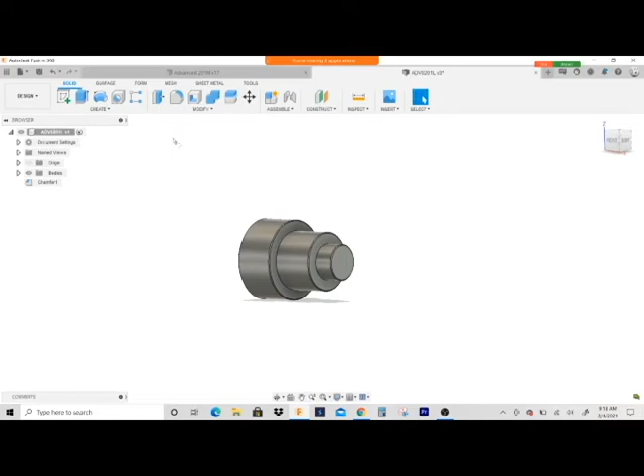So we're gonna go over the lathe section of this. Like I said earlier, if the part doesn't have chamfers on it, just put like a 10 thousandths chamfer on there, unless otherwise specified. And that just helps smooth the part, so you reduce any kind of burr that's on the corner.

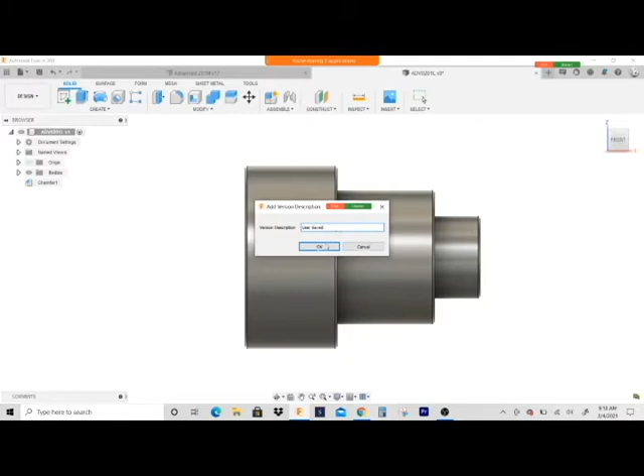Alright, so we got this part. It's going to be right on the lathe. So I'm going to go to manufacture. And once I'm in the manufacture mode, I'm going to go to setup. And I'm going to tell the software that I'm cutting it on a lathe. So it's going to be this turning.

So where it says turning or mill turn, what they're calling mill turn is basically a lathe with live tooling. Because just keep in mind, some lathes have mill functions. They have like a C or Y axis mill capabilities, similar to the video we watched last class. So I'm gonna put it on turning.

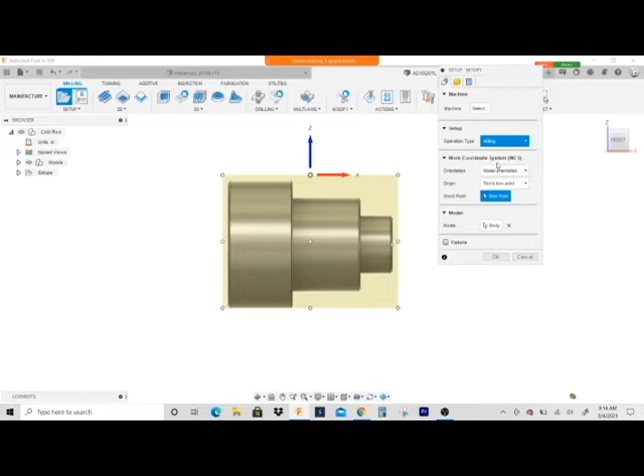And I would suggest, not everybody does it this way, but I think it's the easiest way to do it, to put your origin not on the stock front, because you look right now, the Z0 is on the tip of the stock. Put it on the model front, okay? If you have to do any kind of editing on the program, that makes things way easier.

Also, when you're setting the machine up and running your first initial part, it's really helpful to have your Z0 on the face of the part, because when you're watching your distance to go and watching the tool, make sure it looks like it's going that distance. It just makes things a lot simpler.

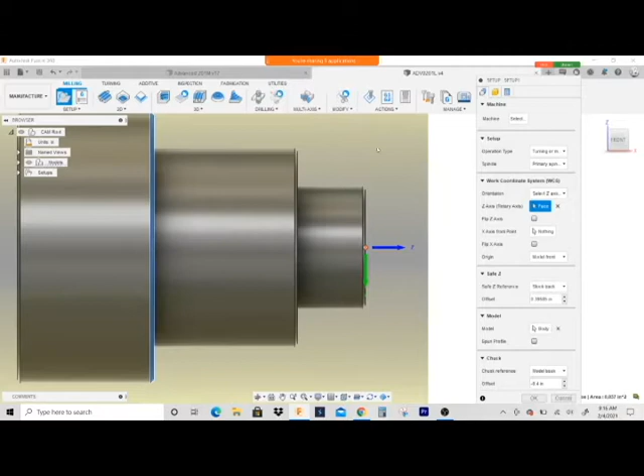Like say that you have to turn back a 1/4 inch, right? So if you look at the program, and it says that it's turning back Z minus 0.25, and you're watching your distance to go, and it's telling you that once you get to Z minus 0.25, you don't have to go any further. It's going to go up this shoulder and then down this nose. It's just a lot simpler.

I would think that Fusion would have that by default, but I guess not everybody uses their lathe like that. I don't know. It seems to make more sense to me to use a lathe where the Z0 is on the face of the part.

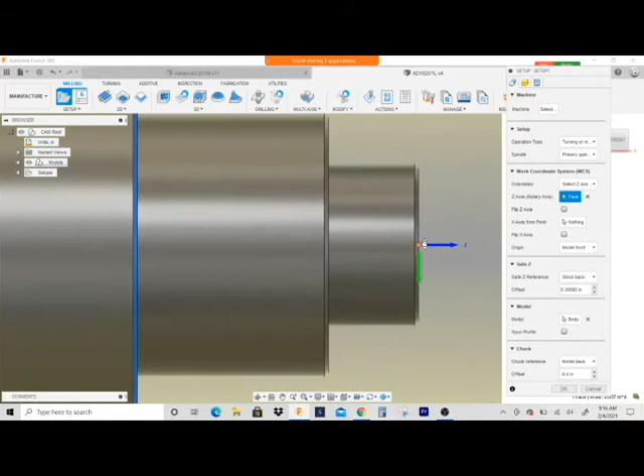Okay, so I'm going to go to my stock tab. I'm going to put it on fixed size cylinder. And the reason why I'm doing that is because if you use relative size cylinder, the first face pass and the OD pass, it may try to take too much material off. So you probably don't want to use a relative size. I would definitely put it on fixed size.

And the OD is going to be 1 inch, which I'm assuming you are using 1 inch material on that. Are y'all cutting this to length, or are y'all gonna part it off on the lathe? Yeah, parting it off is probably the best way to do it. Now, when you first start running the lathe, it may be more troublesome trying to get that part off tool set and working right, but it's relatively simple, really. It's actually easier to just part it off.

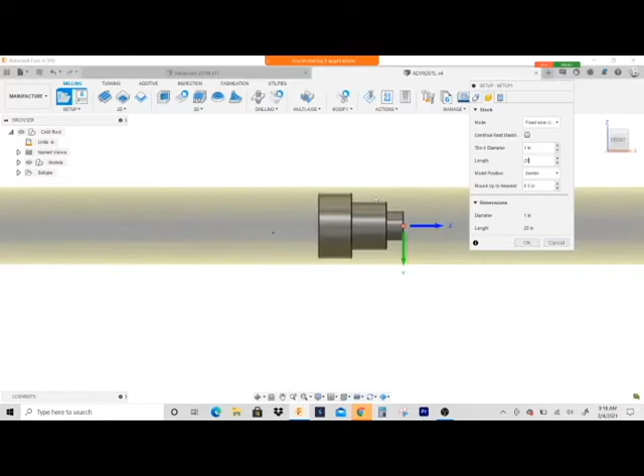But what I would do is, I'm not sure what the through spindle bore size is on the lathe, but let's say our stock's 20 inches long, so you have like a 20-inch piece of material. Now it looks funny on the setup preview. That's because I have to change this model position to be from the front.

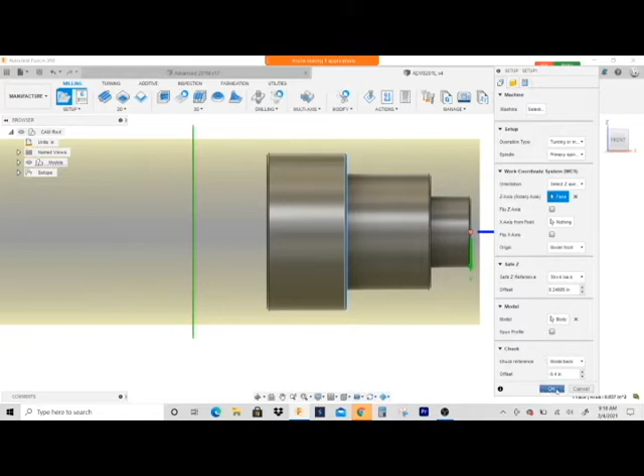But we want to give ourselves some material to face off. Because right now, there wouldn't really be anything to face off. So I would put like 50 or 100 thousandths. 50 thousandths is probably good. So it's gonna look something like this. Yes.

Well, the part off tool would cut it. Yeah, so what you would do is you would face it, turn OD, and the part off tool is gonna part it off to the right length. And I'll show you what I mean in just a minute.

Okay, so first thing I'm gonna do is I'm gonna go to face, and I don't know what y'all's maximum RPM is on that lathe, but yeah, you're cutting aluminum, so we'll go maximum 3,500. That might be a little fast. Yeah, we'll just put it at 3,000.

And I would always use feed per revolution. By default, that should be checked, but it's not. But you're pretty much always going to have your feed rate per revolution on a lathe, unless you're like cutting plastic. If you can, just go maximum RPM at all times. And because of our feed per revolution, I guess it would help to select the tool first.

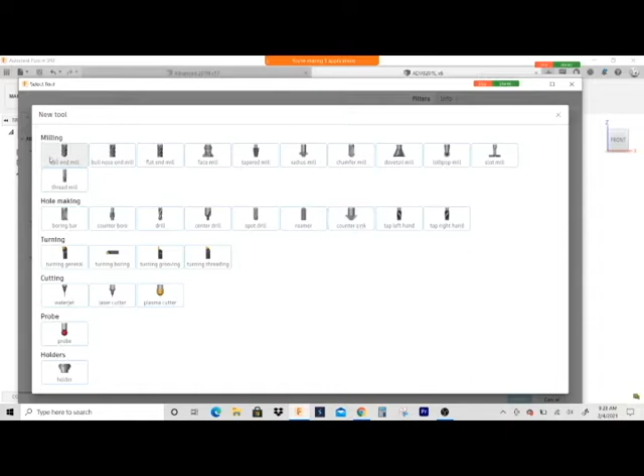Okay, so to create the tool, I'm gonna go to this plus sign, and remember that plus sign is grayed out. That's because you haven't selected a location to add a tool to, like one of these libraries or subfolders. Alright, so I'm going to click the plus sign, and the software wants me to tell it what kind of tool I'm going to make. So I'm going to make a turning general tool.

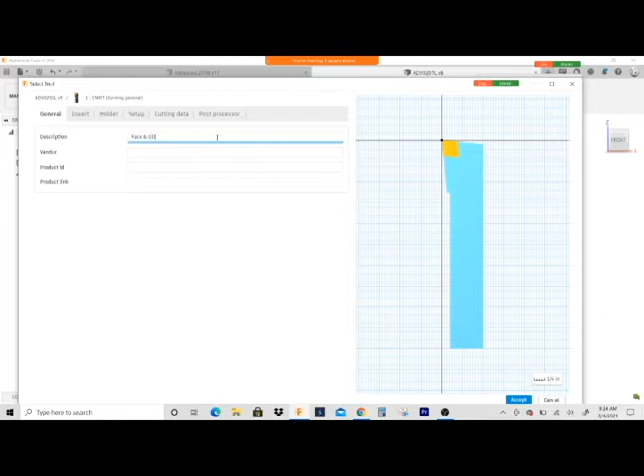And you really only have to do this one time. So if you already did it, just ignore this. Let's see, face and OD turning tool. You can even put like the insert radius. Sometimes what I like to do is I'll put TNR 0.015. That would mean tool nose radius. So basically it has a 15-thousandths tool nose radius.

But that's because I use dedicated tools. Like, I'll have a face and OD tool, and for that tool number that I use repetitively, it'll have a 15-thousandths radius. And then I'll have another turning tool that has a 32. Right?

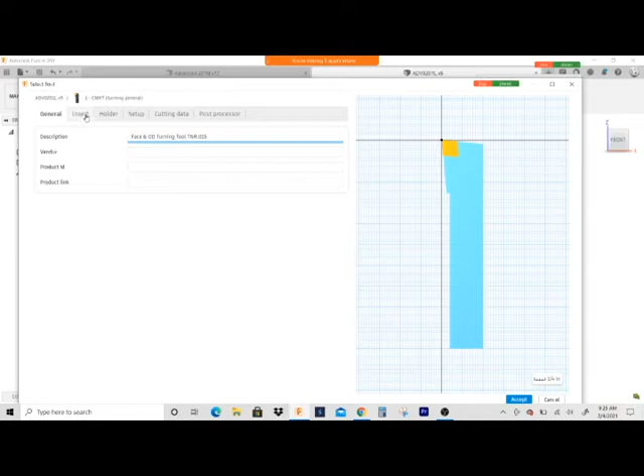Yeah, it kind of keeps things organized. Sometimes you need a 15-thousandths, sometimes you need a 32. 15-thousandths is better at breaking the shavings, and you'll get a nicer surface finish. 32 will last longer, especially if you're cutting abrasive materials or even stainless steel, where tool wear becomes excessive. A bigger radius definitely helps for tool life.

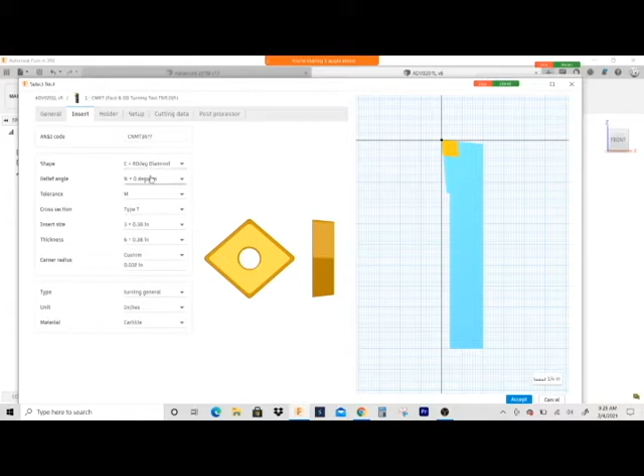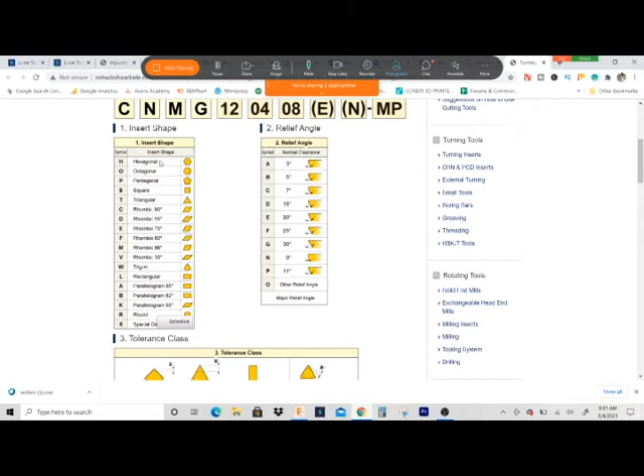So, like on the insert shape, for example, the symbol, you have letter symbols. All right, so H is for hexagon, O is for octagon, P is for pentagon, C is for rhombic 80 degrees, D is for the 55 degree, E is for 75.

Most of the time, the most common sizes you're going to see is like an 80 degree, let's see, an 80 degree, a 55 degree, and a 35 degree. And like a triangle insert. I don't know, we don't use too many hexagon or octagon, not on the lathe. You'll see a lot of triangular inserts.

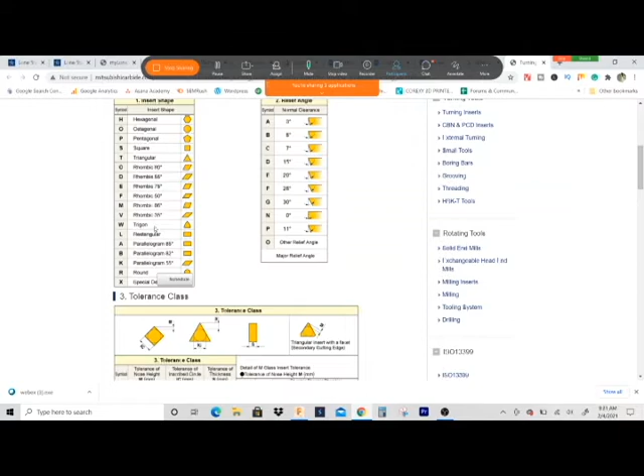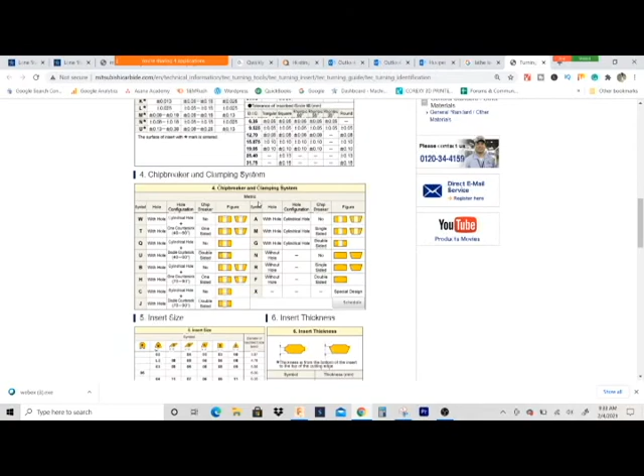Okay, so we got insert shape, we have tolerance class. Then you got different types of chip breakers, insert size. Basically, usually what you do is, this is a CNMG. So on a CNMG, this would be your C, which is already on there. And I have N, M, and instead of a T, this is going to be a G right here. This is the tolerance class right here.

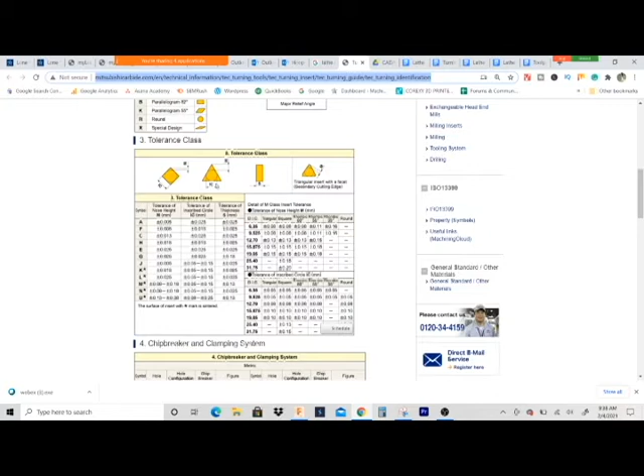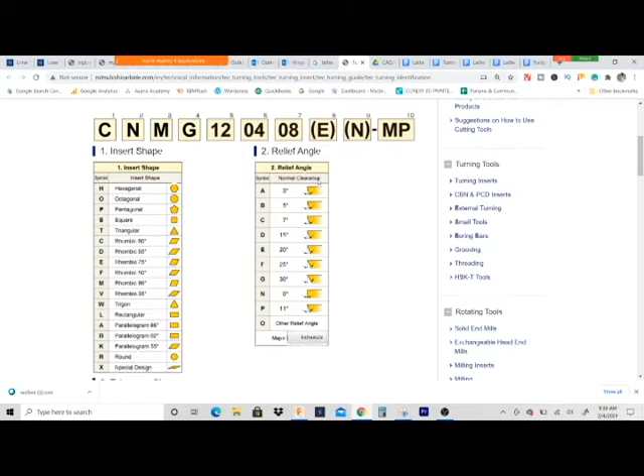So you have like your width, then they have this IC diameter. Basically, your inserts have a labeling chart that they use. Okay, so CNMG, basically, you're gonna fill in for your shape, the relief, the tolerance, and the cross section. Okay, the insert thickness, that's gonna be a 3.

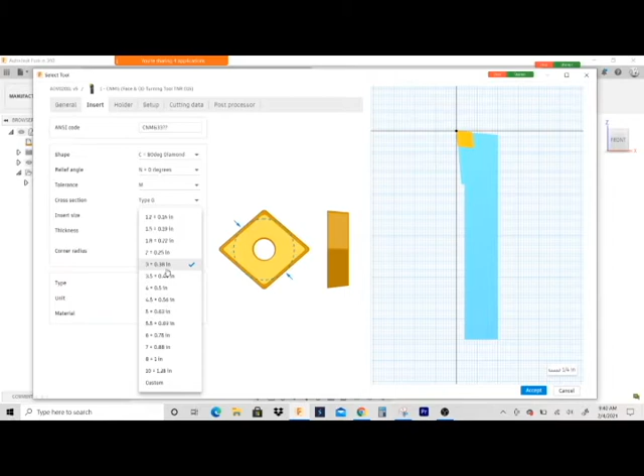And the insert size, I think they call it the inscribed circle. That's what IC is, inscribed circle. But anyways, that's what this is right here. Basically, you just look at this imaginary circle we have right here. That would be 0.38 right there. And that looks about right. I don't know why the thickness came up as 0.38. This would be a number 3. And corner radius, we'll say 0.015. It's not exactly 15 thousandths, but it's close enough.

Okay, so the holder geometry, I really wouldn't worry about this. You really don't have to get all this information. The only thing that you really have to make sure you have right is this corner radius, okay? This will affect your G-code. Now, depending on what kind of toolpaths you're creating, this other stuff may not affect your G-code too much. And what I mean by affect your G-code is if you write a program and you don't use that insert, does the part still come out the same? And usually yes, okay?

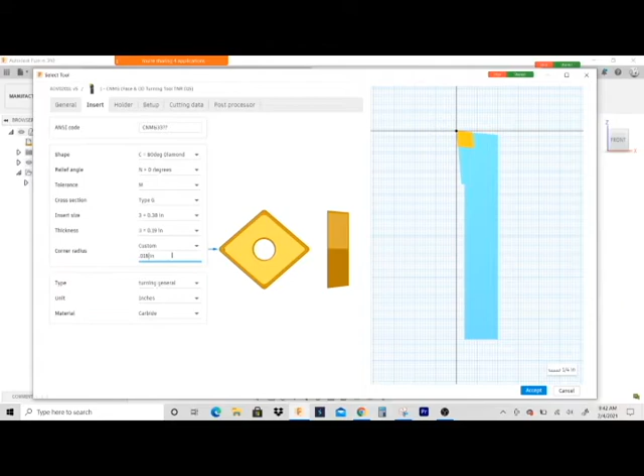Unless in some cases, say you use the square insert, the distance it fed back in the Z direction, basically if you had like a 90-degree shoulder, it may not be 90 degrees. It may be a different angle. But usually, this is a pretty standard insert. So in most cases, as long as this corner radius is right, you should be good to go. The G-code will be fine. Okay, so if you program chamfers and the chamfers aren't actually coming out on the part, that could be some kind of conflict with your corner radius settings. So keep that in mind.

Holder, we'll just leave that default. Setup orientation, by default this should come out right. Okay, now when you start boring and doing stuff like OD grooving and ID grooving, this page may not come up default in the right orientation. You'll have to change it. But for a general face and OD cut tool, yeah, the orientation is going to be right.

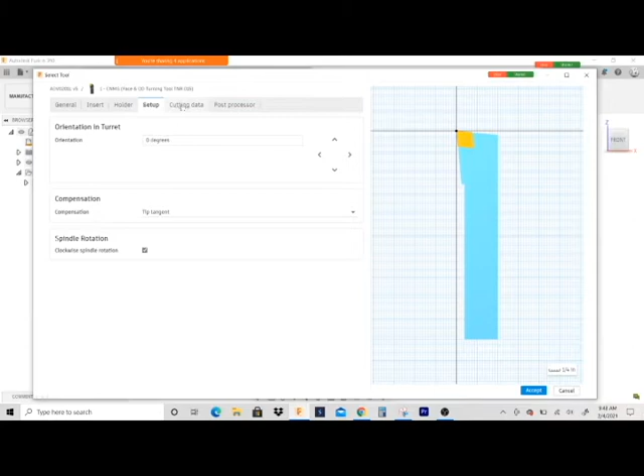Cutting data, so these usually have some kind of ranges that you can work within. Now there's more to it, depending on what material you're using. This right here, your surface speed can be anywhere from like 950 to like 1150. I think by the book for basic carbon steel, it's like 1150. I found on my machine running it at 950 actually works better.

On stainless steel, I've seen people go as low as like 250 or 350 surface feet. Okay, that's not RPM. It affects your RPM, but it's not your RPM. It's your constant surface speed. Okay.

I'm not sure if everyone knows what constant surface speed is, but basically, instead of calculating your spindle speed by RPM, revolutions per minute, it's the amount of material that travels across the tool. Say that you have an 8-inch diameter part in your chuck. It's round, right? If you were to unwrap it where it was straight and flat, that distance would be the distance that travels across the tool interface per revolution.

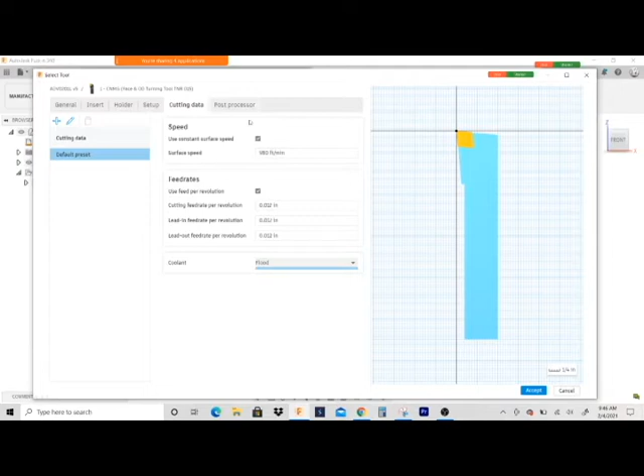Cutting feed rate per revolution, by the book, 12 thousandths is standard for roughing on a lot of materials. Depending on the hardness of the material, you maybe will go faster or slower. And it's your tool number.

One thing you want to watch out for on the lathe is make sure that your maximum RPM here isn't too fast. 5,000 is probably fine for a small part. Now, if you have a part that's over 3 or 4 inches in diameter, I would not want to be going 5,000 RPM. Typically, the larger the diameter, the slower you're going to go on RPM. Now, it's not calculating the speed by RPM, but there is a set maximum RPM you can reach.

The reason why it has to have both of these is because if you're traveling 950, depending on how far you're out on the X, this is going to speed up or slow down to maintain 950. As you get closer to the center, the spindle will start speeding up faster and faster to maintain 950 surface feet traveling across the tool interface. So you're going to quickly meet your maximum RPM as you get closer to the center of the part. So it's a good idea to have a maximum RPM.

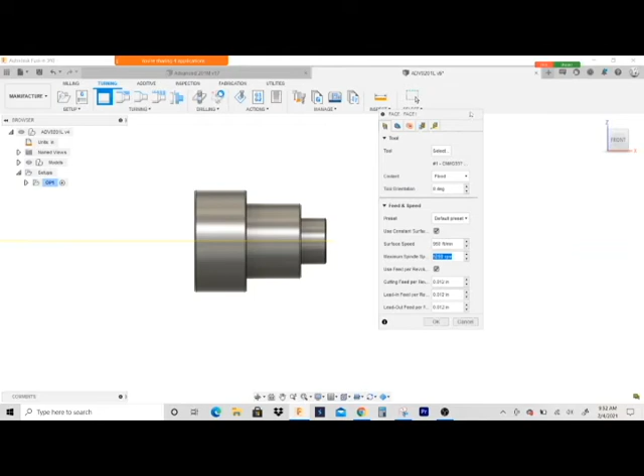Once that happens, think about it this way: you have a bar material this long sticking out from the chuck, right? If you turn the spindle on and it deflects and whips back 90 degrees, then you have this spinning mass that's sitting there spinning. It could tear the machine up. You could possibly destroy that lathe that's in the shop by going too fast. So just be careful. Not trying to scare y'all, but it's definitely something you want to watch out for.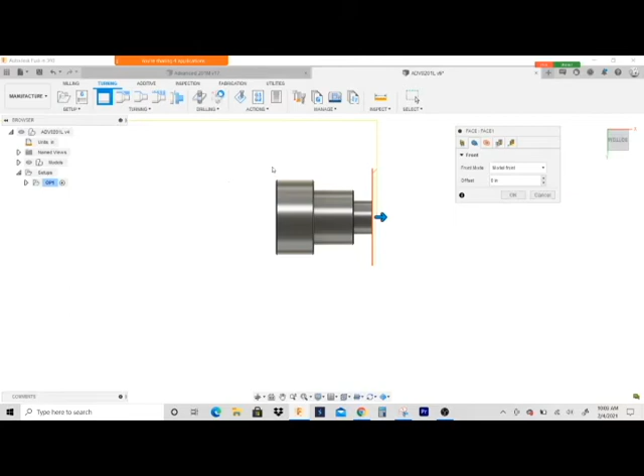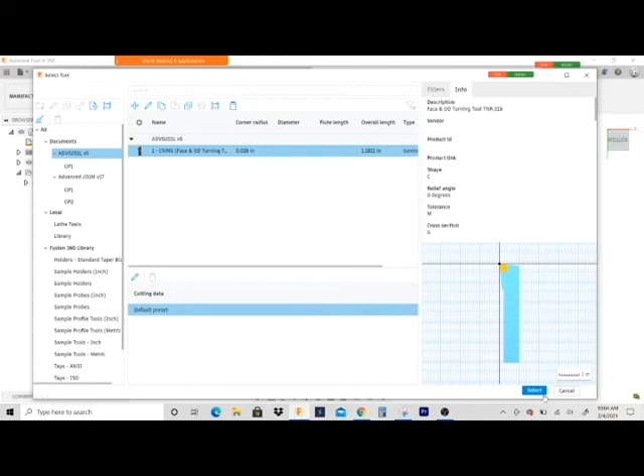Okay, so we'll bump this down to 3,000. I know I was kind of talking, I'm gonna start over on that. Okay, so I got this set up. The first thing I'm gonna do is face the part. So I'm gonna select that tool that I just created a minute ago. We'll bump the maximum RPM down some. And I can also change that in the tool settings too. So by default, that comes up a lower number.

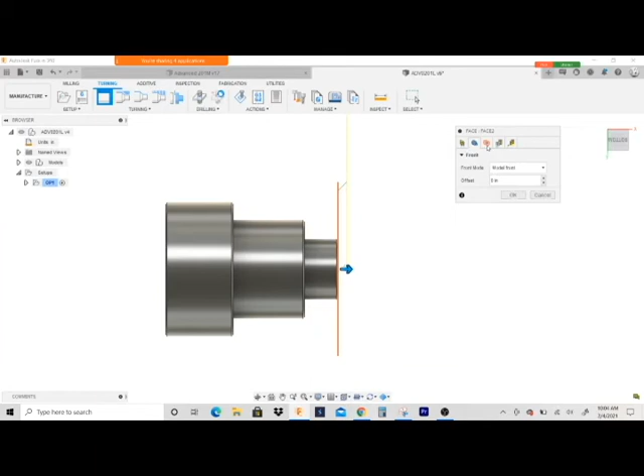So the next tab is the geometry. You just want to select the face of the part, which is usually the model front. I would suggest using the model front. Then you have the radii of the part. The way Fusion works now, you used to have to actually enter all these values and tell the software how to run it. Nowadays, you can literally just hit OK. By default the settings are right.

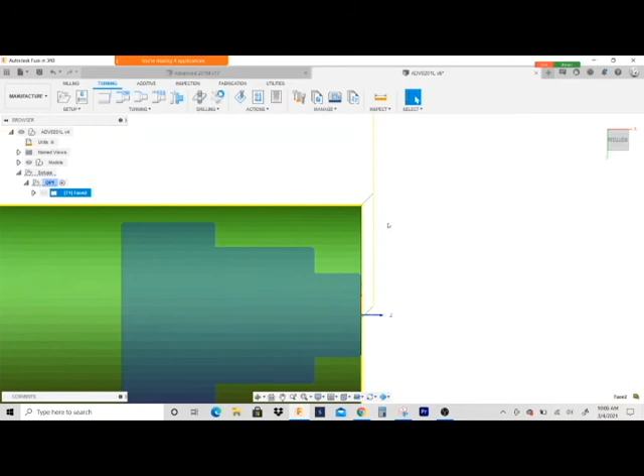Now, the only thing is, say that you have 100 thousandths to face off. Well, it just took that material in one pass, which may be too much of a load for that tool.

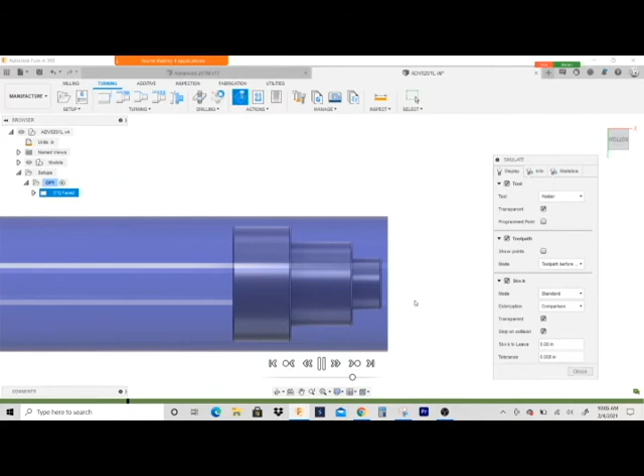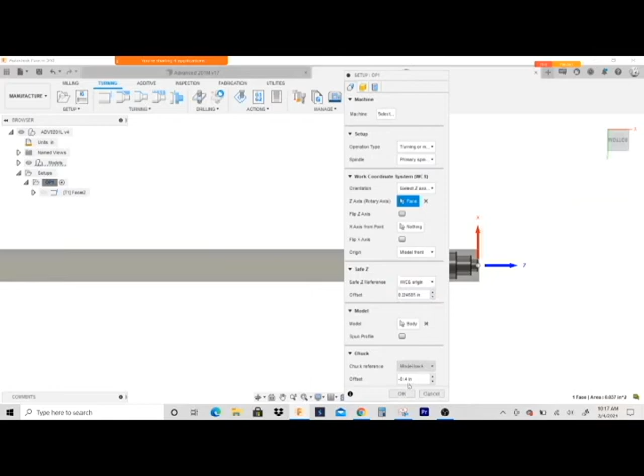Whoa, hold on. What's going on here? Alright, so when I hit simulate and play, notice where my tool's coming back. If y'all have this problem where the tool is actually coming from back here, I guess on the newest update, they've always had this option on here. It could have been me, I could have accidentally selected that. I had it on stock back. It needs to be on stock front. WCS origin should work the same as stock front, because our origin is right here. Let's check it out.

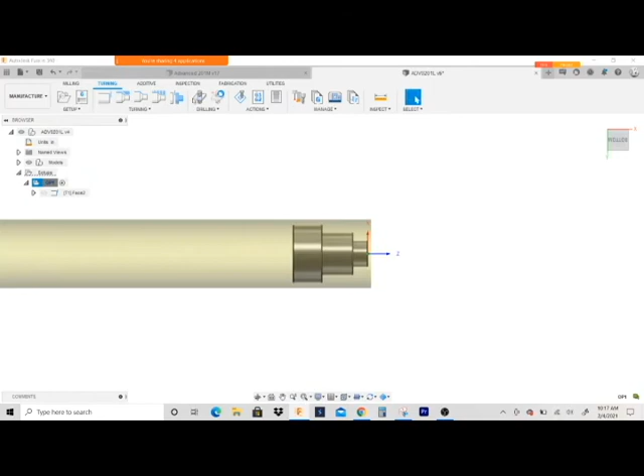But anyways, for future reference, on your setup, your safe Z reference, don't put that on stock back. I don't know if I accidentally clicked stock back or that was the default setting, but y'all saw what happened.

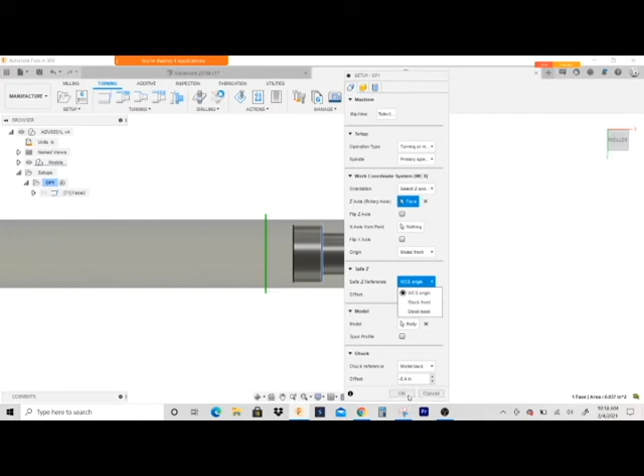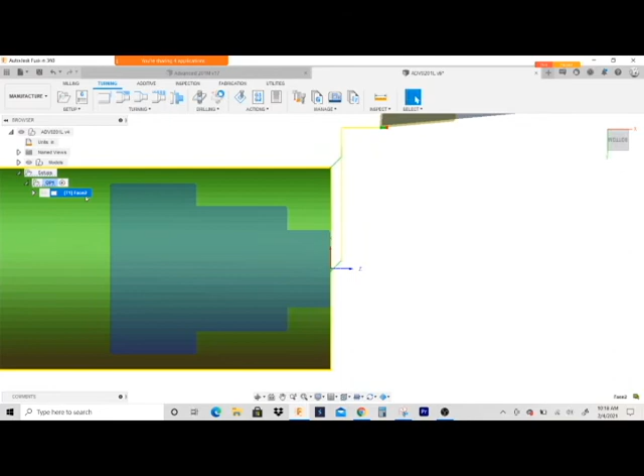Okay, so sometimes, if you look at this face pass, it's just taking one pass, right? Sometimes that's going to be too much for your tool to handle, or with one pass your surface finish isn't going to look that good. So what you could do is on your passes tab, put this on multiple passes, and 40 thousandths step over is good. That's a good value. And now it takes 2 passes.

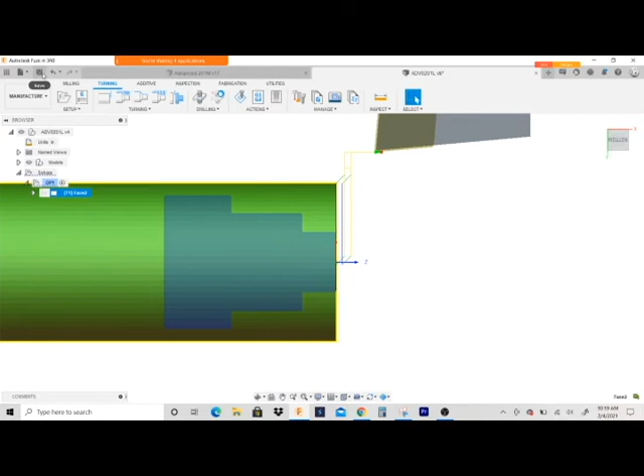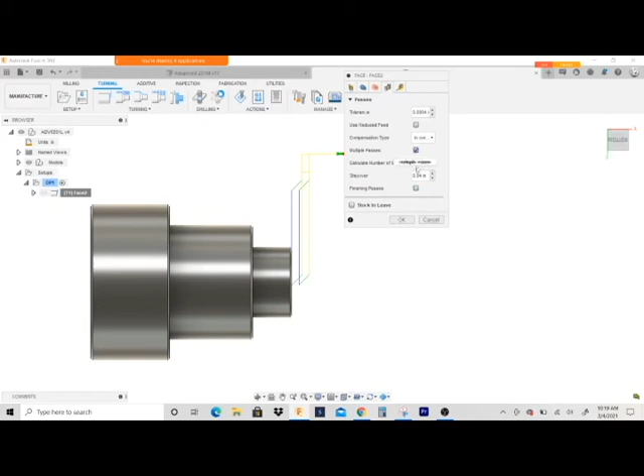So that setting we just changed to multiple passes, how did it calculate 2 passes? Because we didn't tell it to take 2 passes. We told it to take 40 thousandths step over. There's no spot to tell it how many passes to take. Well, it's calculating on the setup for the stock. It's calculating the distance in front of the part, right?

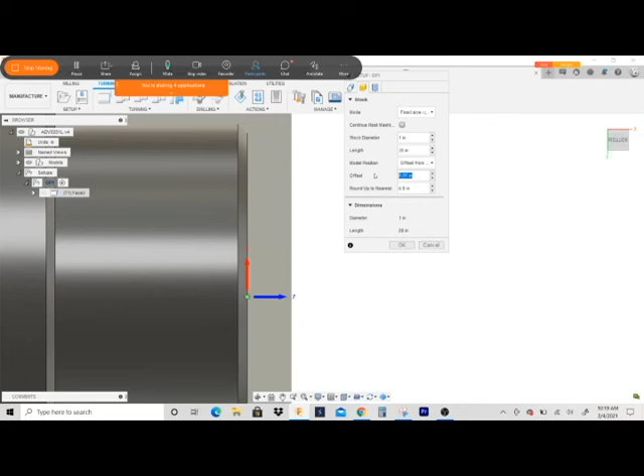So this distance from here to where the stock starts, that's 100 thousandths. Or is it? Hold on. No, it's 50 thousandths. Whatever number. Okay, so say, just for the fun of it, I put this to 1 inch.

So right here, I have 1 inch to face off. So if I regenerate this toolpath, what you're gonna see is this. So now it has a bunch of passes, right? So that's how it's calculating how many passes to take.

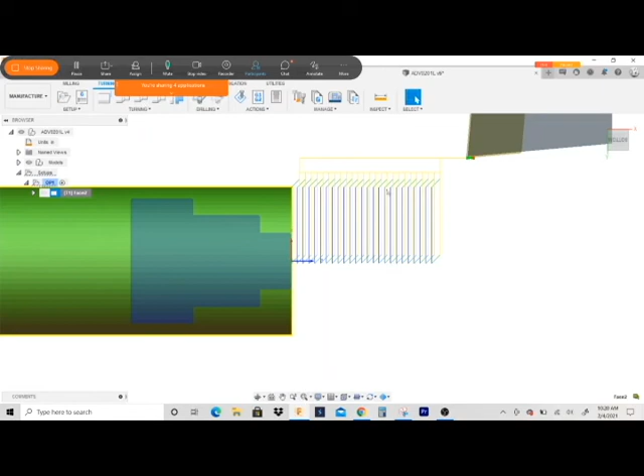It looks at how much stock material you told it that's in front of the part, and how many passes, like we tell the step over distance. So it takes the stock that's left, that needs to be faced off, and divides that by 40 thousandths to calculate the number of passes. But anyways, I'll change that back.

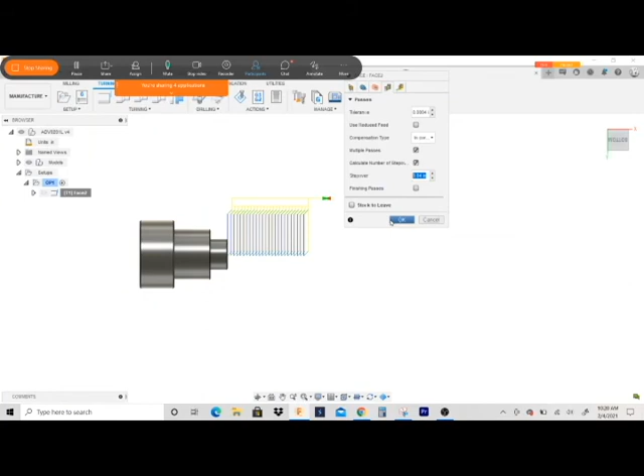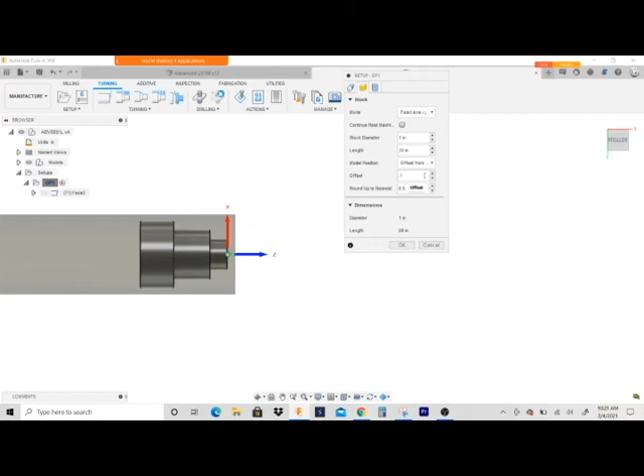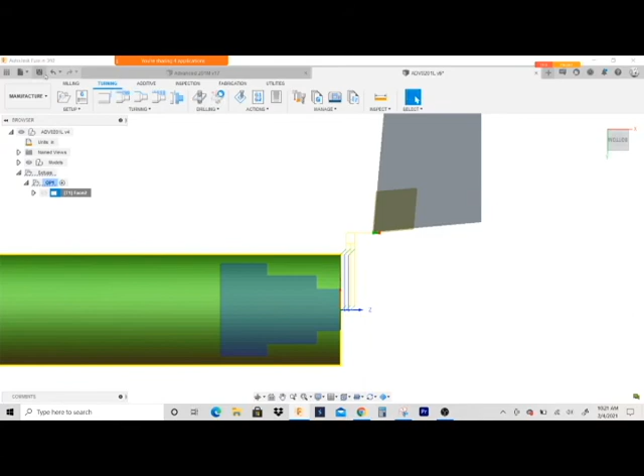Probably 0.05, or Garrett's probably gonna want y'all to put like 100 thousandths on there, and that's a good number. But after you change that value, you have to regenerate the toolpath so it can recalculate. And in this case, with 100 thousandths, it's gonna be 3 passes there. Okay. So that's the face.

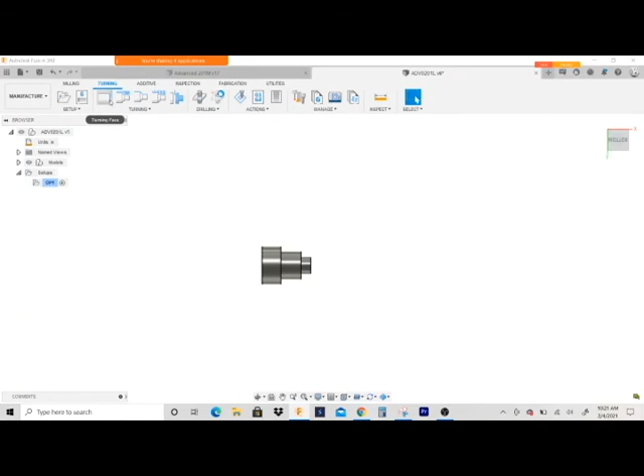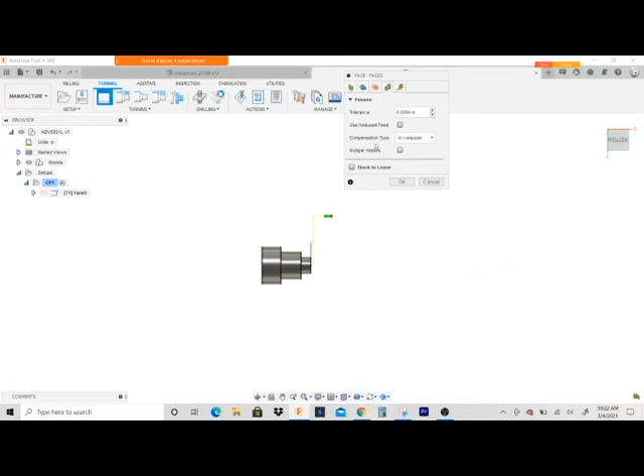And I kind of went over everything in a lot of detail. I mean, to keep it simple, say I delete this face, so I don't have it, right? Literally, all you have to do is go to turning face, select your tool, make sure your maximum RPM isn't too fast. In all reality, you could just hit OK. I would put it on multiple passes, and that's it. Like, that's all I had to do. I changed like 3 things.

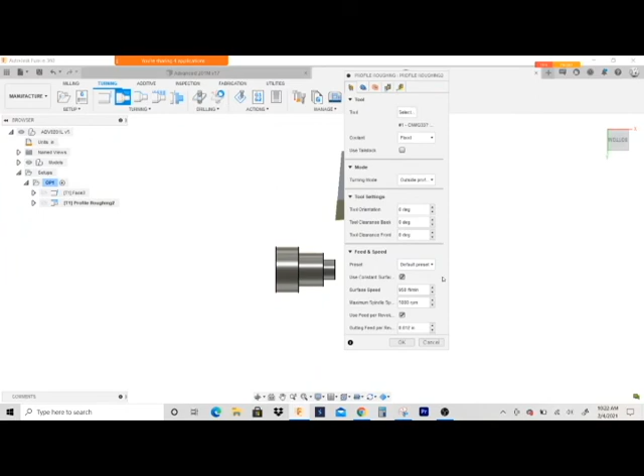The OD is pretty simple. I'm gonna use the same tool. Maximum RPM. Now, when I go to create a profile roughing, which is an OD cut. It could be used for ID, you would change it. Right now it's set on outside profiling. If I was boring and using a boring bar, I would put it on inside. But I'm not, so I'm gonna have this on the outside.

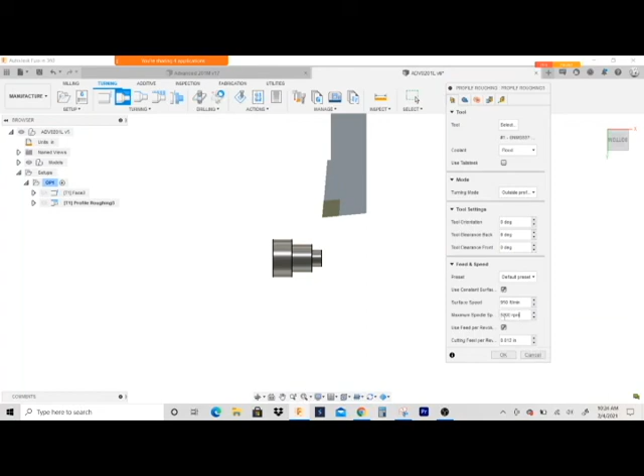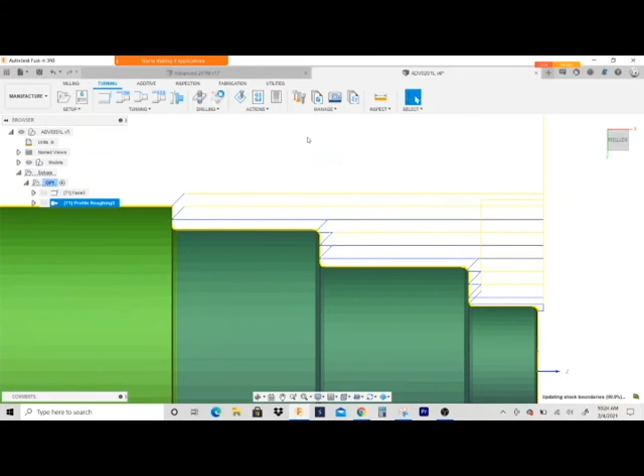We'll bump that RPM down some. Just for the sake of the lesson, I'm going to leave a lot of this default and show you the toolpath it gives us, and then show you how to modify it. Let's see. I can literally hit OK, and it's going to give me a toolpath. Now, it may not be perfect, which it does look pretty good. That actually doesn't look bad at all.

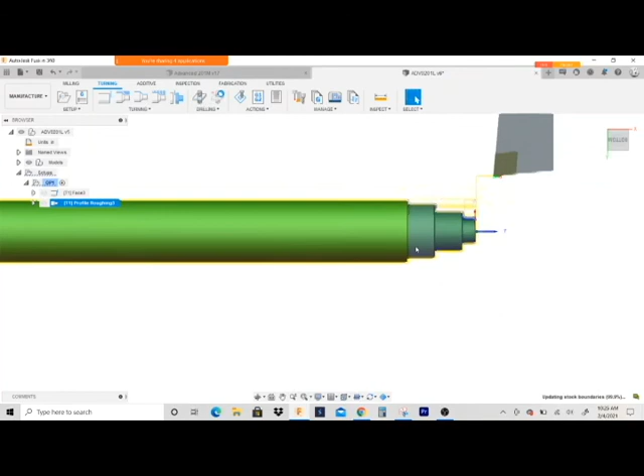Well, we got 20 inches actually. Okay, so this is assuming that you're gonna part it off. At the school, y'all usually run one part at a time. Think about it this way. In the machine shop scenario, you're trying to reduce waste, and if you saw a piece of stock off, but it's an inch longer, you're gonna have more waste than if you leave it on the bar.

Usually, the spindle of the machine is 20 inches, 24 inches. It depends on what machine you're using. Usually what you do is you cut a bar that goes all the way inside that spindle, right? So when you go to part it off, you're holding on to the stock, to that bar. Now if you cut this an inch longer, then that kind of makes things more of a pain, really. It would look something like this.

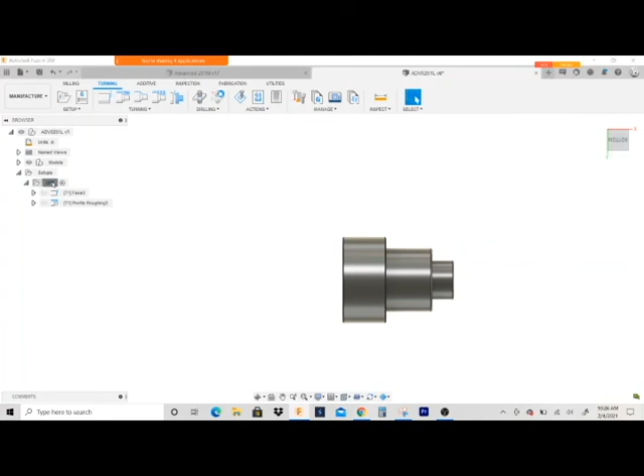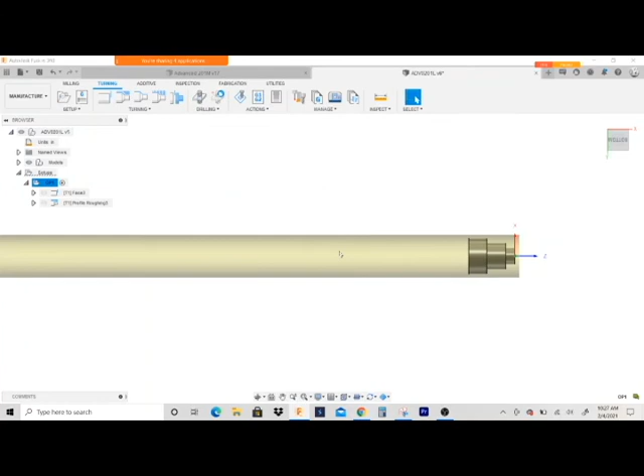Now I gotta be honest, I'm just telling y'all how you would do it in a machine shop. The way y'all do it in class may be different because it's a different context. The school's gonna be a lot different than a real machine shop, because in a real machine shop you're trying to make money. In the school, they're trying to make sure you learn. But this is how you would do it in a shop. You would actually have your whole stock bar in there.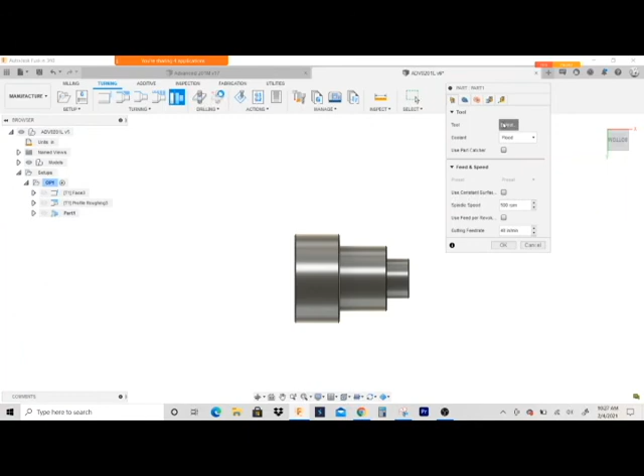And so this still needs to be parted off, right? So what you could do is go to turning part, and y'all probably don't have a part off tool, so we'll go ahead and make one. Well, we'll just go through the process. So on turning, it doesn't actually have a cutoff tool, but if you think about it, what is a cutoff tool? It's pretty much a long grooving tool. So we're going to select grooving.